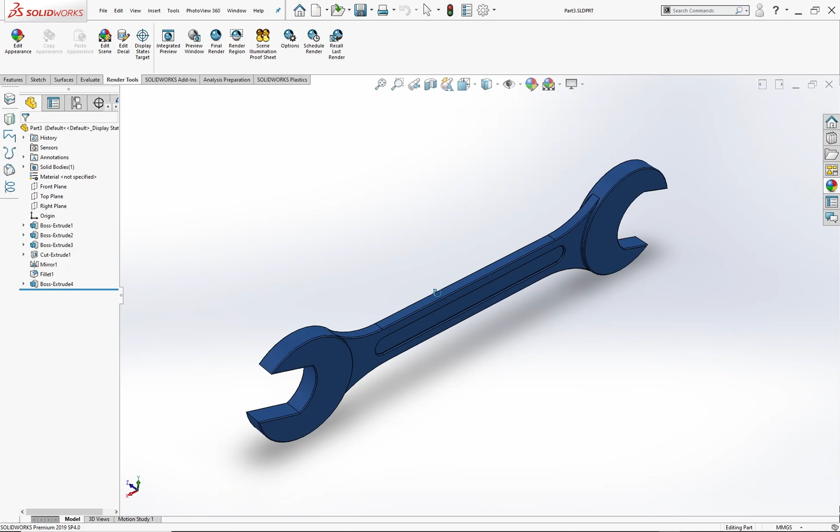In this tutorial, we are going to model a wrench, also known as open-end spanner, in very simple steps. So without wasting any time, let's start this.

First, select the front plane and select the circle tool. It will automatically sketch on the front plane. Start sketching by drawing a circle around the origin. Select the smart dimension tool and set the diameter to 32. Select the center line tool and draw a line like this.

Select the line tool and draw two lines like this. Hold Ctrl key and select these two lines, make them equal and parallel. Now hold Ctrl key and select these two lines and the center line, and add symmetric relation to them.

Now select center point arc. Start sketching the arc by positioning the arc center on this center line. Hold Ctrl and select the open end of the arc and the end of this line, and add a merge relation to them.

Now select Smart Dimension tool and set a distance of 17 between these two lines. Select Center Line tool and draw a horizontal line starting from origin like this. By selecting the Smart Dimension tool, add an angular dimension between these two lines and set it to 17 degrees.

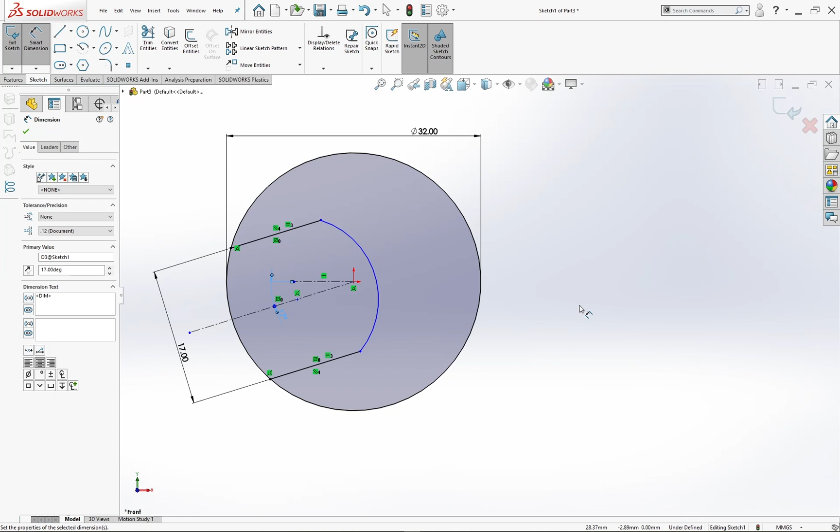Set the horizontal distance between the center point of the arc and origin to 6. Set the radius of the arc to 9. Now select the Trim tool and trim out these two arcs. Our sketch is now fully defined.

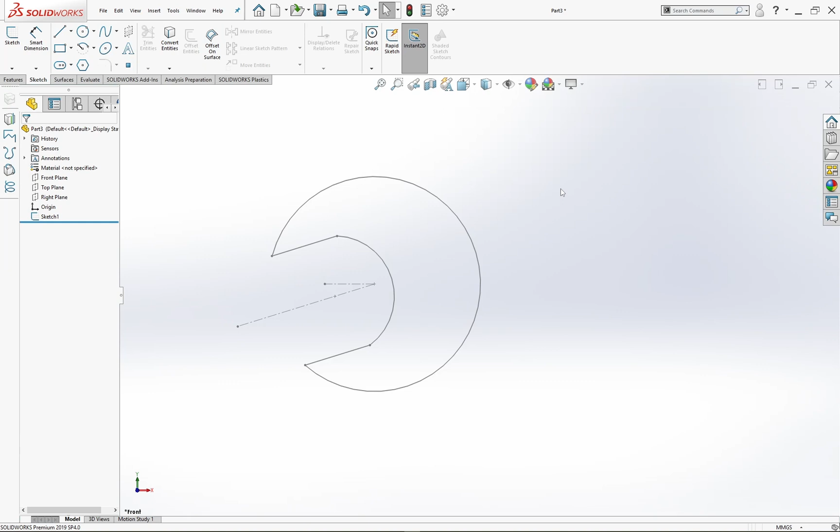Exit the sketch. Now select the sketch we have drawn, go to the Feature menu and select Extruded Boss feature. Set the direction of the extrude to midplane, set the length of the extrude to 5, and exit the extrude feature. Our first spanner of 17 mm has been completed.

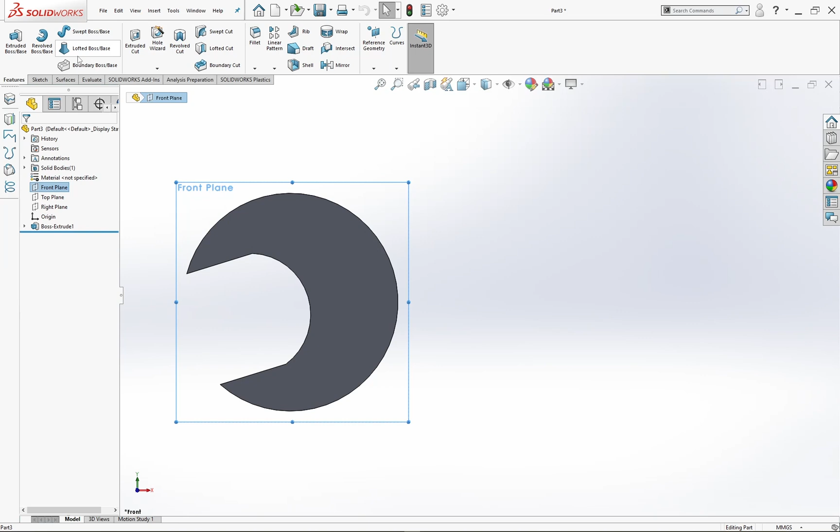Now we will draw the other spanner on the right side. Start drawing the sketch by selecting the front plane and select the sketch tool. Select the circle tool and draw a circle like this. Select center line tool and draw a line from origin to the center point of the circle. Select the smart dimension tool and set the dimension of this line to 110.

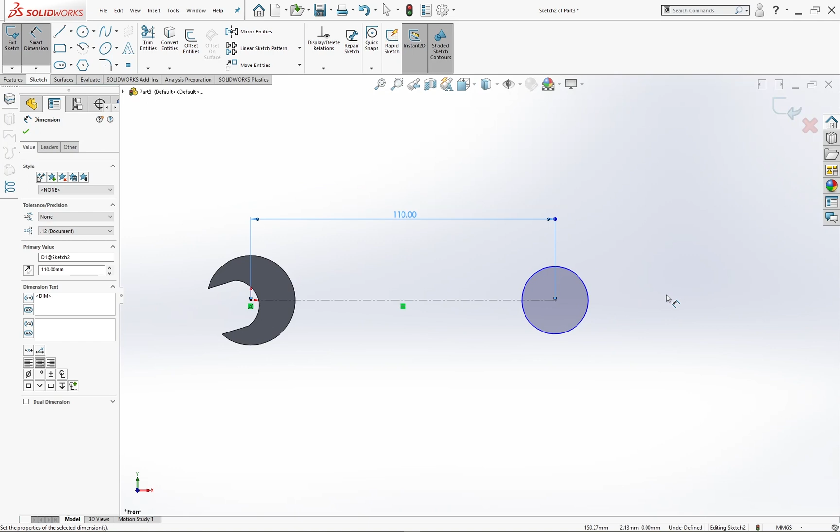Select center line tool and draw a line like this starting from the origin. Draw another center line like this and make it horizontal. Select Smart Dimension tool and set the angular dimension between these two lines to 17 degrees.

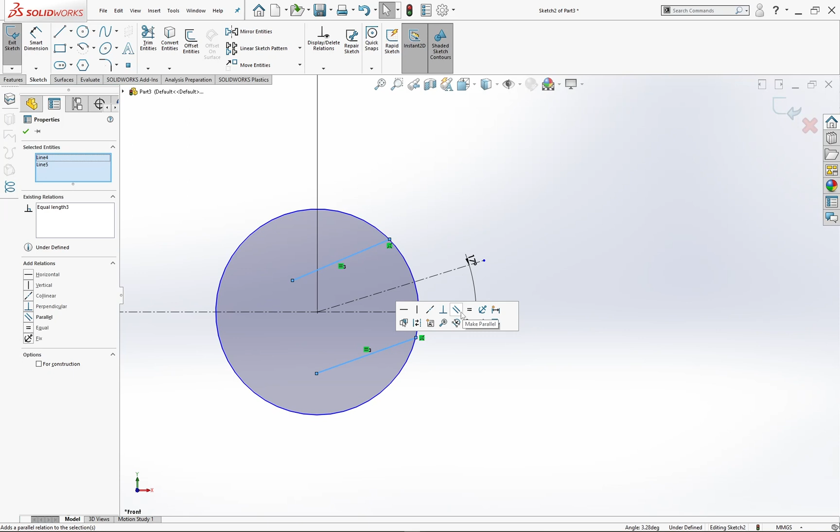Select Line tool and draw two lines like this. Hold Ctrl key and select these two lines and add equal and parallel relation to them. Hold Ctrl key and select these two lines, the center line, and add symmetric relation to them. Now select center point arc and set the center of the arc on this line and draw an arc like this. Hold Ctrl and select and merge them together.

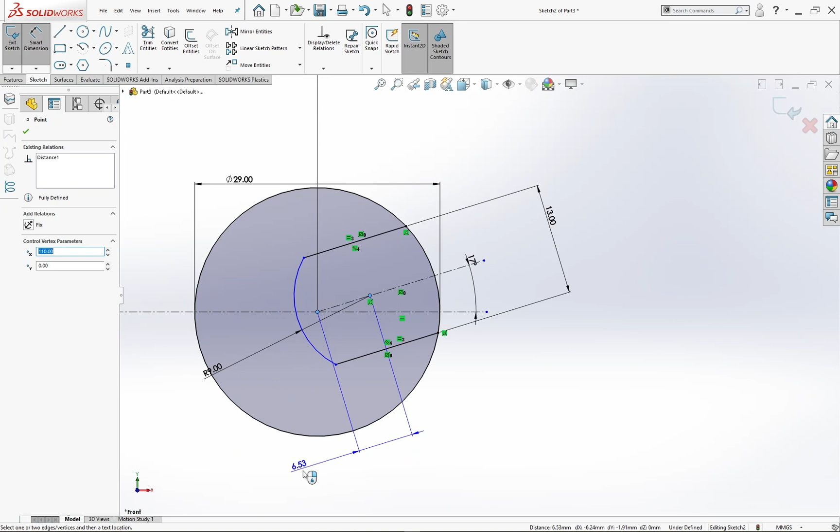Select Smart Dimension tool and set the radius of the arc to 9 and the diameter of the circle to 29, and set the distance between these two lines to 13. And the distance between the center point of the arc and this point to 6. Now select the Trim tool and trim out these extra arcs.

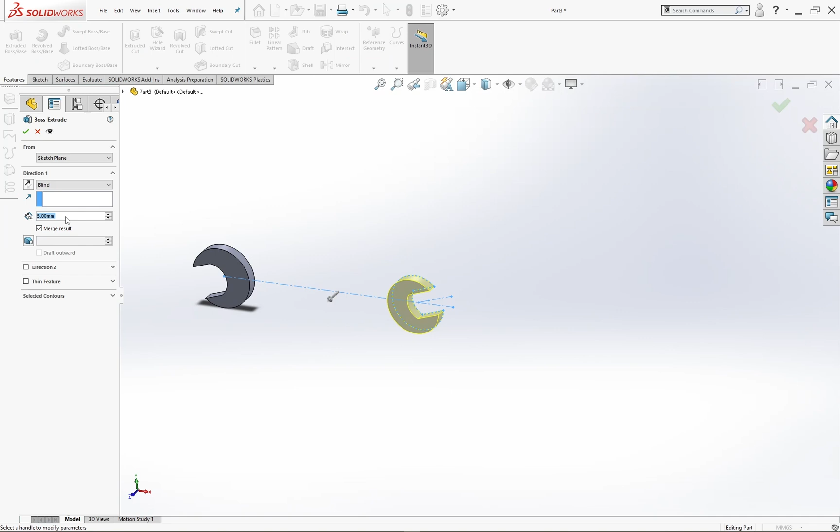As our sketch is now fully defined, exit the sketch and go to the Feature menu and select Extrude feature. Select the direction of the extrude and set it to midplane. Keep the extrude length to 5 and hit OK.

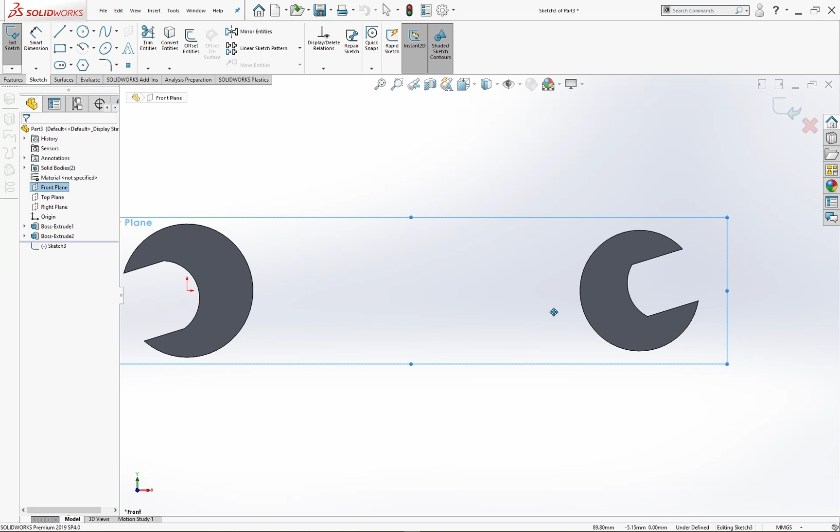Now we will create the handle body of the spanner. Select the front plane and start sketching on it. By selecting the center line tool, draw a horizontal line like this. Hold Control key and select this point and this arc, and add concentric relation.

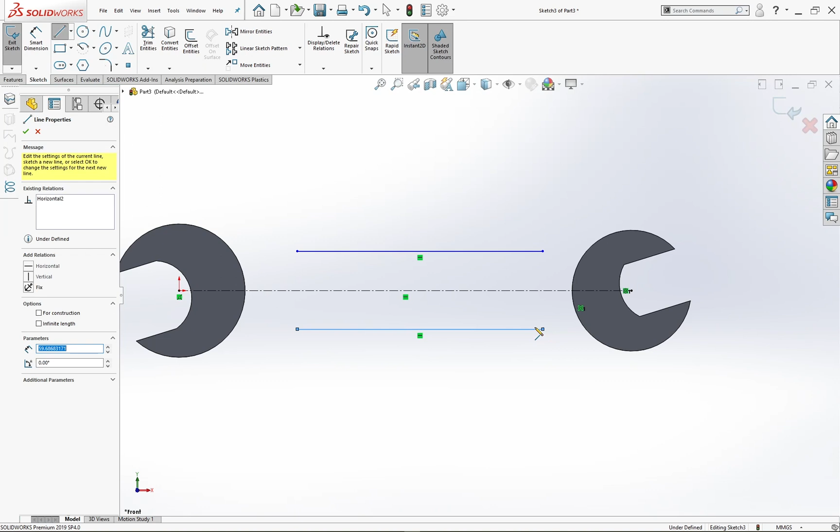Now select the line tool and draw two horizontal lines like this. Hold Control key and select these two lines and center line and add the symmetric relation. Select Smart Dimension tool and set the distance between these two lines to 11.

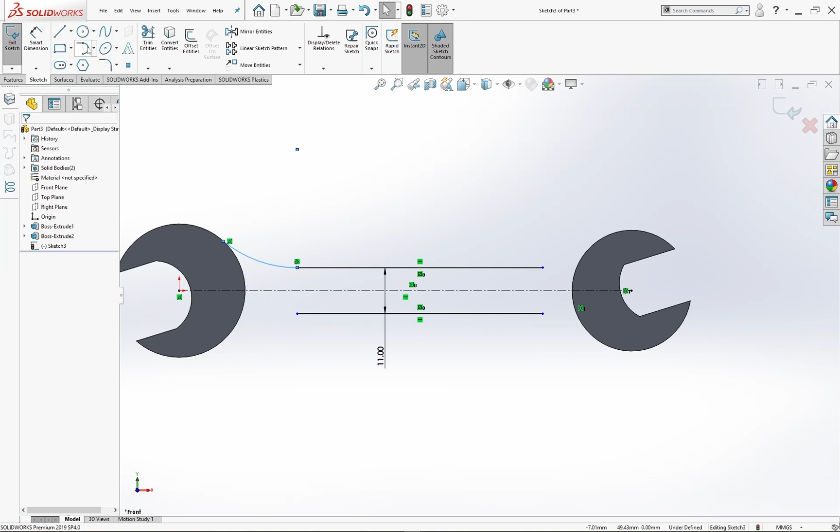Select Tangent Arc tool and start drawing the arcs like this. Hold Control key and start adding tangent relation to these arcs like this.

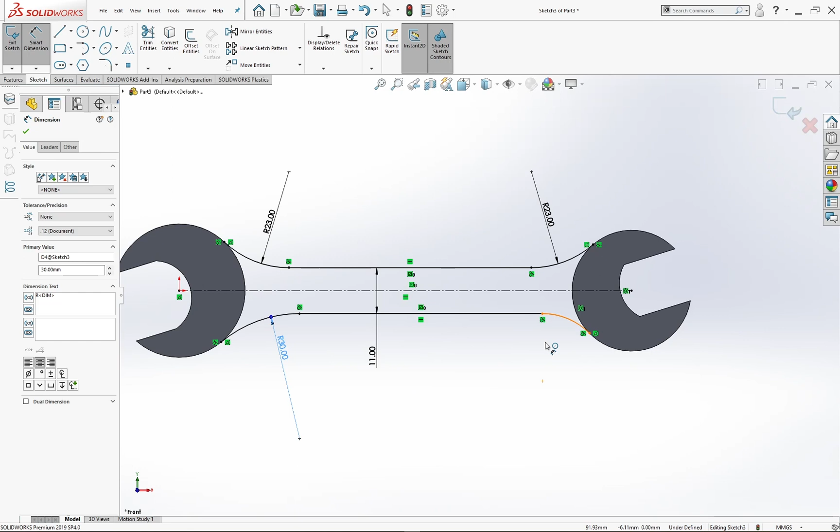Select Smart Dimension tool and set the radius of these two arcs to 23, and 30 for these two arcs. Select Convert Entities tool and select the circular arcs like this and hit OK. Select the Trim tool and trim out these extra arcs.

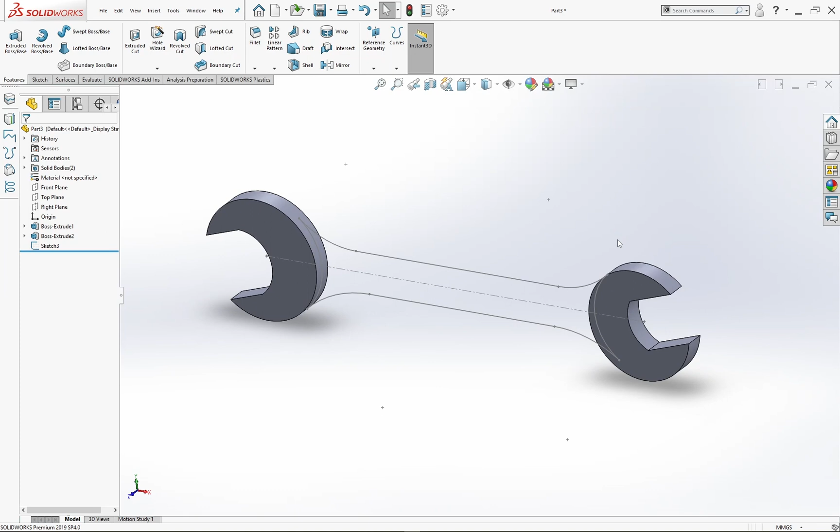Now the sketch is closed, so exit the sketch. Now select the sketch we have created and go to Feature menu and select the Extruded Boss feature. Set the direction of the extrude to midplane and set the distance of the extrude to 3 mm and hit OK. We have finally created our open end spanner.

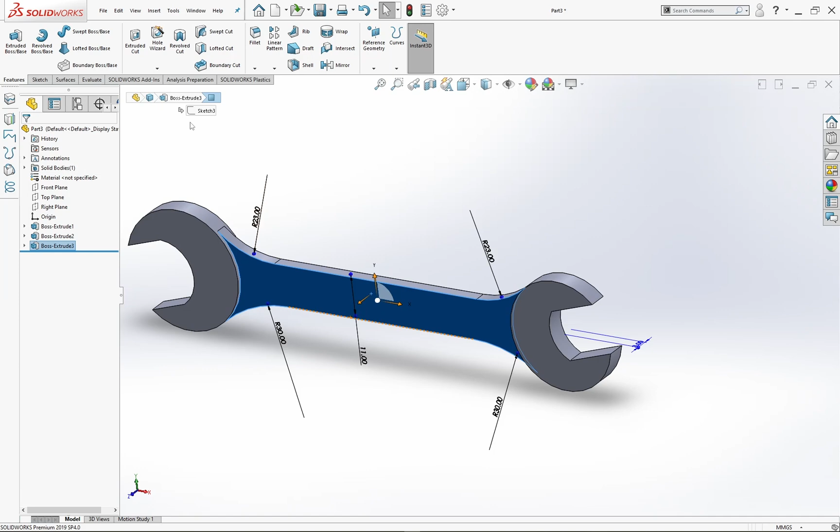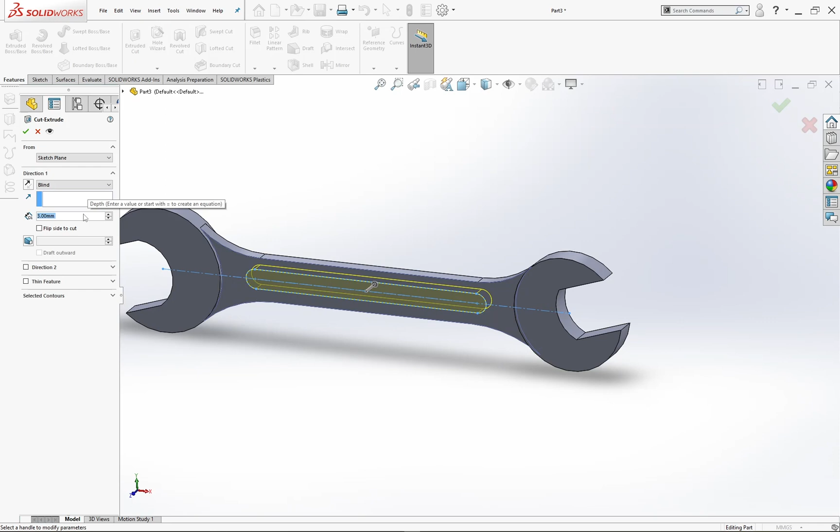Set the distance between these two points to 60, and set the width of the slot to 5 mm, and exit the sketch. Now go to Feature menu and select the Extruded Cut feature. Set the depth of the cut to 0.5 mm.

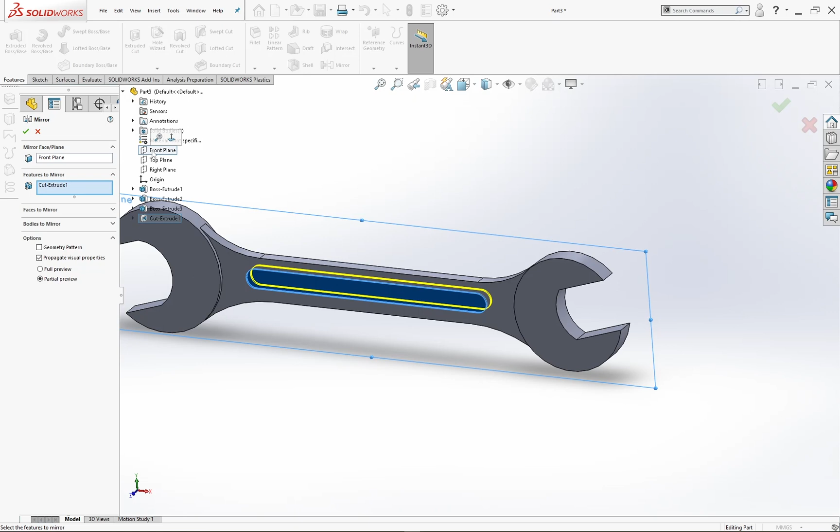Now select the Extruded Cut feature we have created and select Mirror tool, and select the front plane to set it as the plane of symmetry. Now select Fillet tool and set the radius of the fillet to 0.25, and start selecting the faces like this.

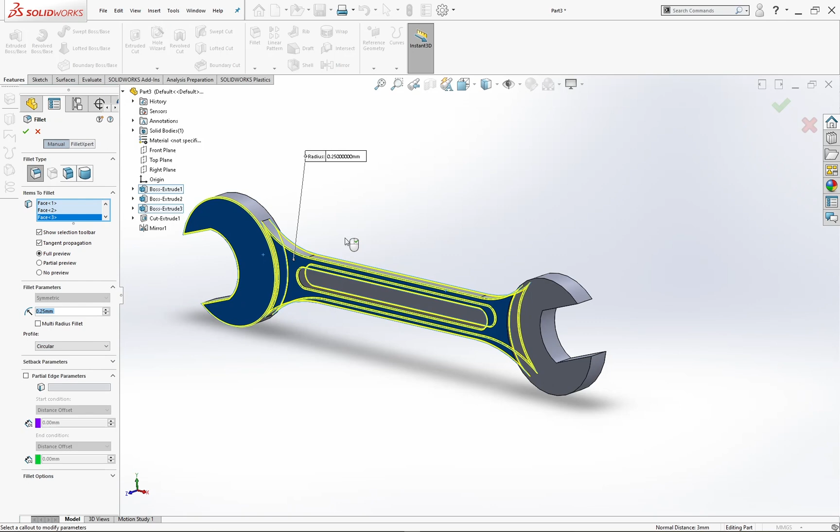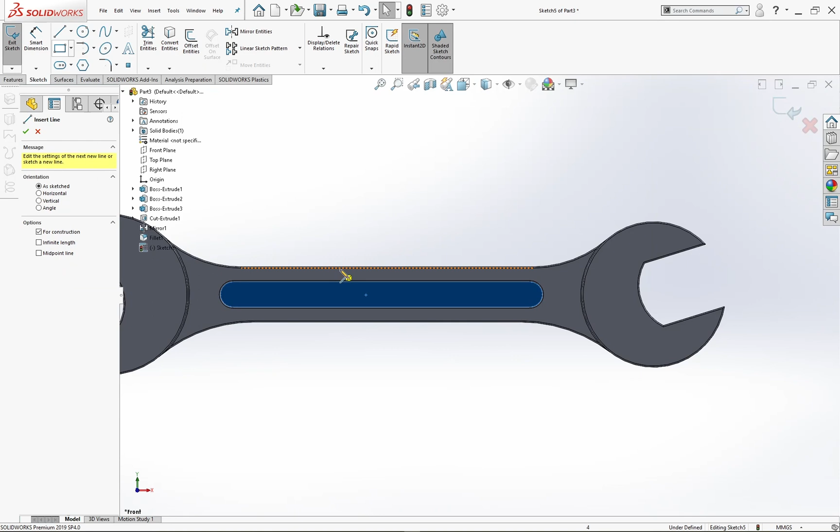Now to add the numbers and the text as shown in the picture, select the surface of the body and start sketching by drawing a center line like this. Set the distance between the center point of the line and origin to 55. Set the distance of the line to 55. And set the distance between these two lines to 0.75.

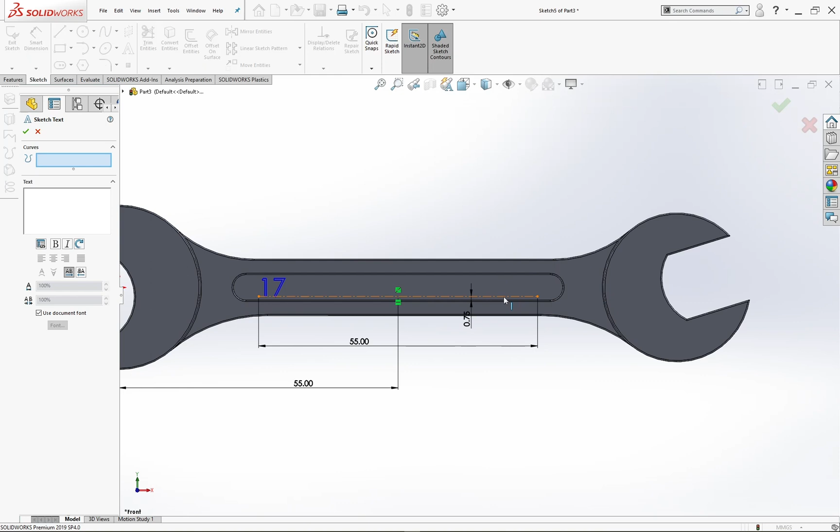Now select the text tool and click on this line. Write 17 in the text box. Now again select the text tool, write 13 in the text box and select the right align in the paragraph setting.

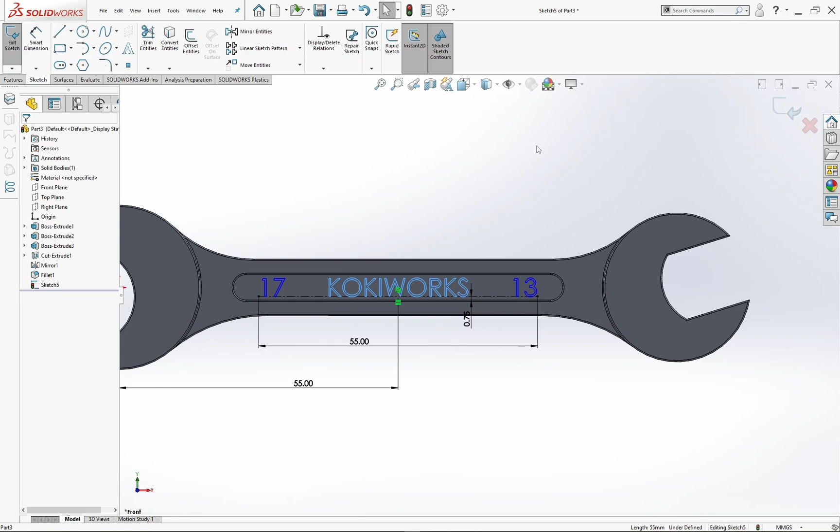Again select the text tool and click on this line and write whatever you like in the text box. Select the middle align in the paragraph setting of the text and exit the sketch.

Now select the sketch we have created and go to feature menu and select extruded boss feature, and set the value of the extrude to 0.3 mm.